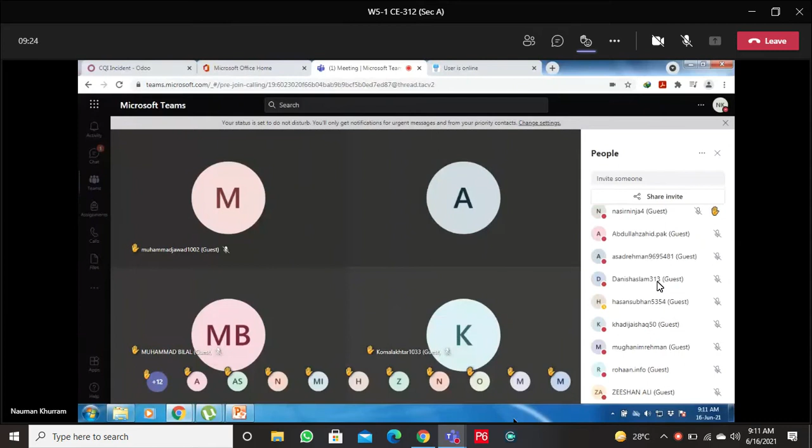Zeeshan Ali, please respond. Yes, sir. So you haven't watched the video yet? No, sir. Sorry, sir.

No problem. So have you downloaded the videos? Yes, sir. Okay, that's fine.

Please watch all the videos, and whatever questions you have, please write down so that you could ask me in the coming lectures, or maybe when we will have the psychomotor assessment week, so you can ask me these questions physically. Okay, Mr. Rohaan, Deputy CR.

Mr. Rohaan, so-called Deputy CR, are you online?

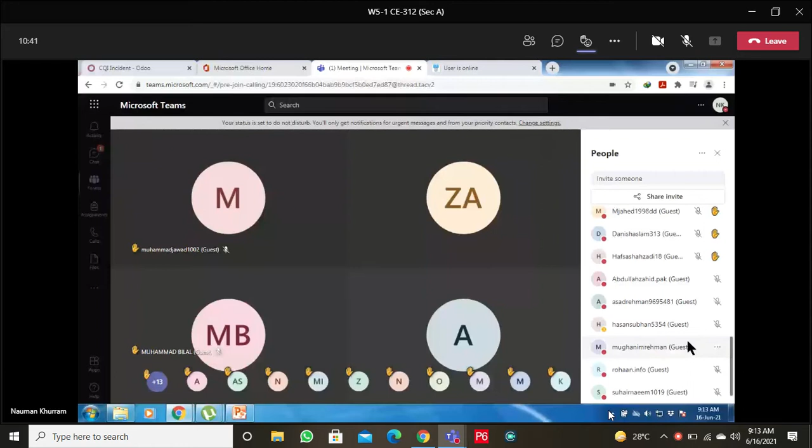Okay students, I would like to clear one thing. Regarding the shear center, when you study the characteristics of shear center, the shear center always exists at the intersection of center lines of all elements.

For example, you are having a T section. In case of a T section, if center lines of all elements intersect at one point, the shear center will be that intersection point.

But if you have a doubly symmetric section, in that case the centroid will be the shear center.

But in case of an angle section, the shear center will be this junction point, because that is the intersection of the center lines of this vertical leg and this horizontal leg.

So even though we have the centroid over here, we do not apply the load along the centroidal axis, because if we apply the load at the centroidal axis, it will cause twisting along with bending.

That's why in most of the books, if you find the loading diagrams, the load is acting at the shear center point, passing through the center line of this vertical leg.

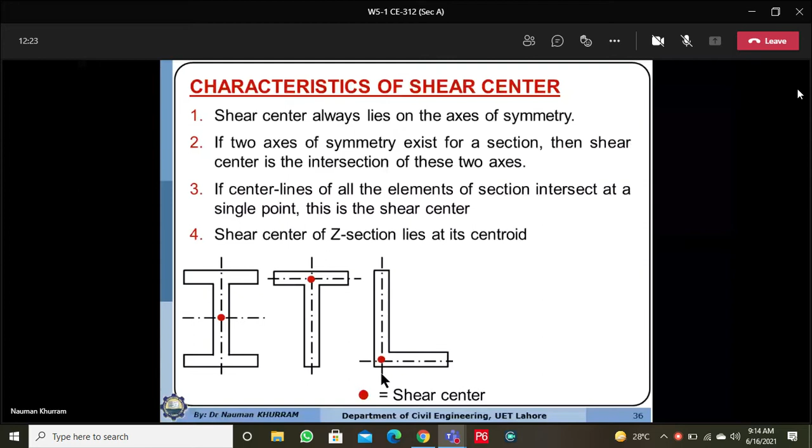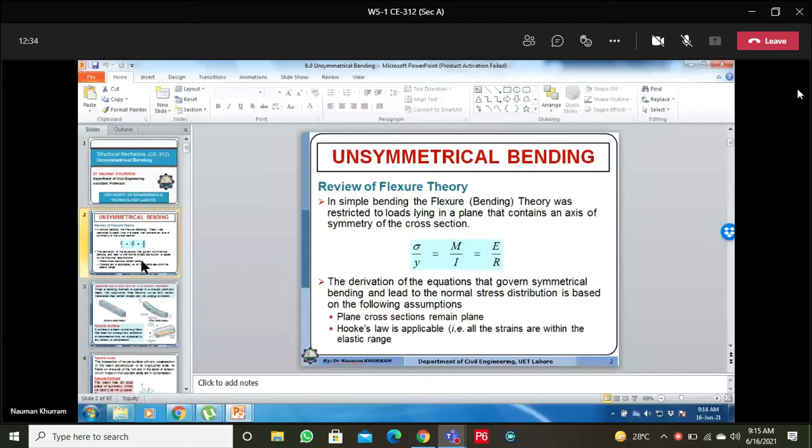That's why, for example, when we study unsymmetrical bending, in that case, for example, to avoid the twisting, the load must pass through this center line, the intersection of this flange and web.

If the load is passing through the centroid instead, even though it passes through the centroid, this will bend along with twisting.

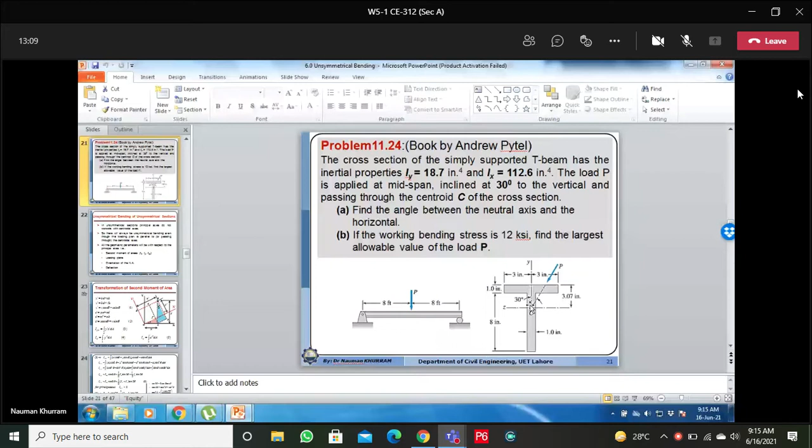Similarly, for the angle section, the correct loading to avoid the twisting is that it should act through the center line of this vertical leg.

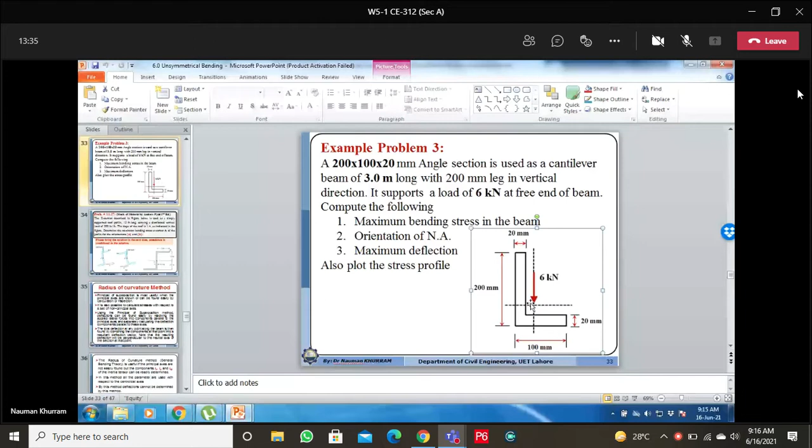If the load is acting here, it is acting at certain eccentricity from the center, so it will twist along with bending, and you will have extra bending stress, so that you will clear up. The center of this T section is over here, and the center of this Z section will always be at the centroid, because the distribution of the area is even though that is not a symmetrical section.

So today we are going to discuss the solution of this problem. Before discussing the solution, I would like to, okay, later on I will download it.

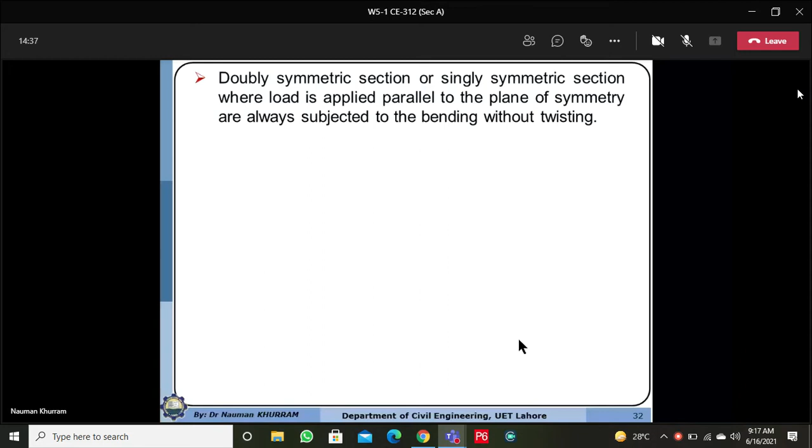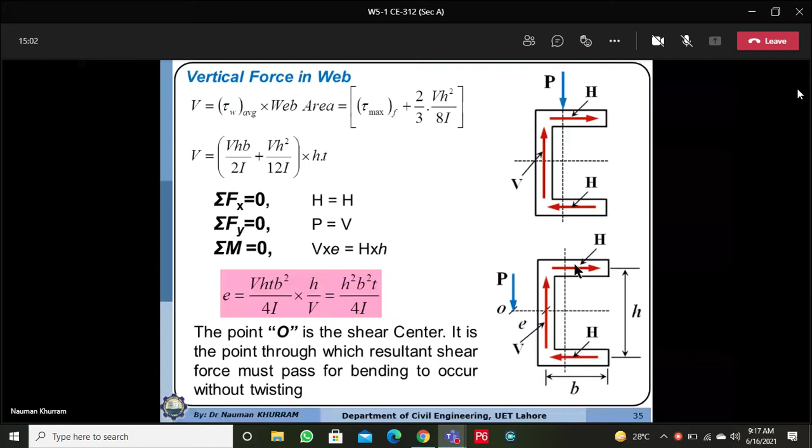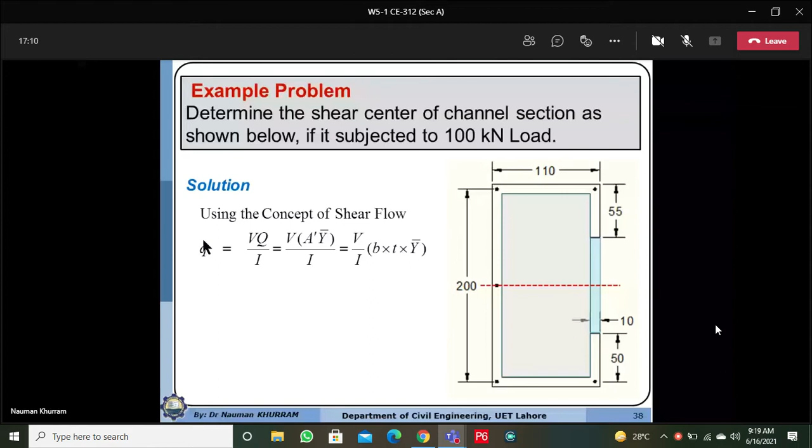So using the concept of shear flow formula, you will also have the B value or the thickness here. So the expression for shear flow is VQ over I. V is the resisting shear, which will be equal to the applied force. I is the moment of inertia of the entire cross section. Q is the static moment of area under consideration, of partial area, which can be written as a partial area and moment arm of partial area with respect to the neutral axis.

Since the load is acting in vertical direction, the moment will produce about the x-axis, so we need to compute the moment of inertia about the x-axis. The partial area may have any width and thickness, and the moment arm we have to determine accordingly.

First of all, we need to determine the moment of inertia of this net section. You can determine it by considering the area by parts, or you can determine the moment of inertia of the gross area, and then subtract the moment of inertia of this rectangular and internal rectangular or hollow area to determine the moment of inertia of the net area.

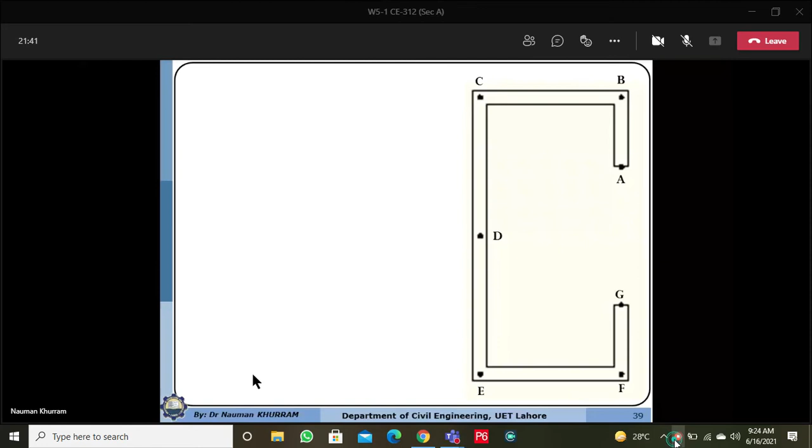Okay, next. First of all, whenever you are dealing with this type of problem, you need to plot three things. First of all, you need to show the direction of the shear flow, in which direction the shear is flowing, by using the analogy of water flow. So we are assuming that the applied load is acting downward directly.

So anyhow, if the shear flow in this web is acting upward, so by using the analogy of shear flow, flow is always unidirectional. The total shear flow coming at point E should be equal to total shear flow leaving point E. So from E, the flow is moving upward. It means that flow is coming from F to E. So direction of the shear flow will be over here.

And similarly, direction of the shear flow from C to B will be like this. And similarly, if you know the direction of the shear flow from F to E, then it means that flow is coming from G to F. And similarly, flow is moving from B to A because flow should be unidirectional.

So this we have plotted by using the concept of water flow. So that's why that is called shear flow.

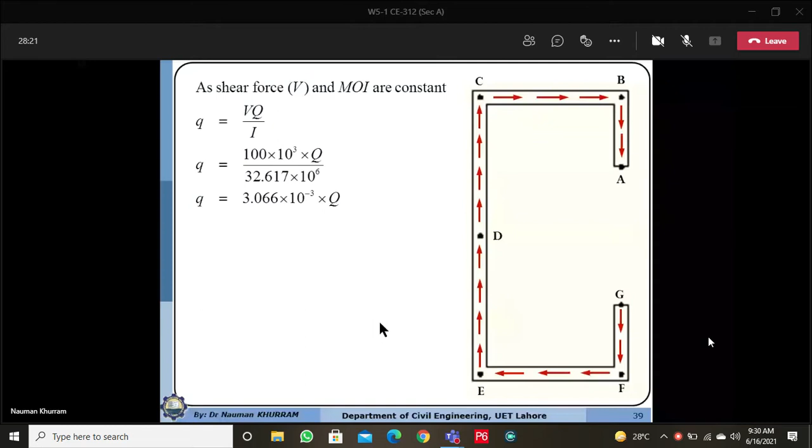We are having entire area, but on the bottom side, we do not have any area, so QA will be equal to 0. That's why shear flow at point A will be equal to 0. I have also written a reason because no partial area exists at the bottom side.

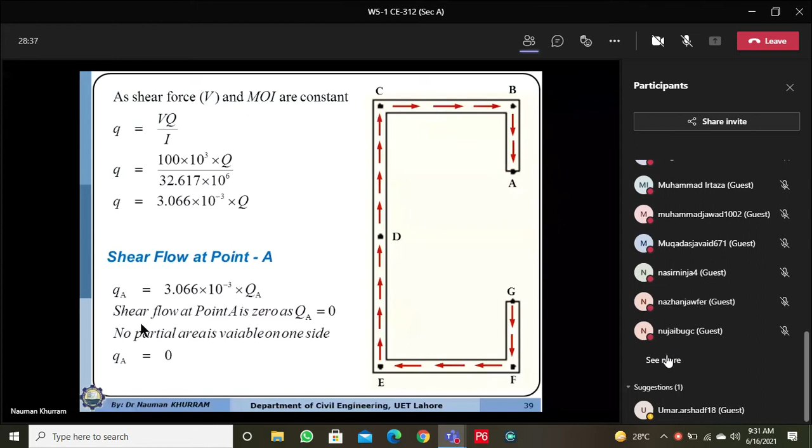Next, we would like to determine the shear flow at point B. When I want to determine the shear flow at point B, I need to consider the area starting from point A to B, using the contribution of the area from A to B. I will assume the cutting layer at point B with respect to this projected length. Thickness of this area will equal the thickness of this projected portion, since thickness is always perpendicular to the length of the area, not equal to the entire line. So thickness is considered with respect to this projected portion.

Shear flow at B will equal this constant parameter times the contribution of area from A to B, or static moment of area from A to B. Shear flow at B can be computed by considering the partial area on either side of this cutting layer, so I will consider this area because it is smaller in magnitude. Please note that I am determining the shear flow at the center of the element, since shear flow is always determined and plotted through the center line of the element, so I'm determining it at this junction. Shear flow with respect to this projected portion of length can be computed by this expression QAB.

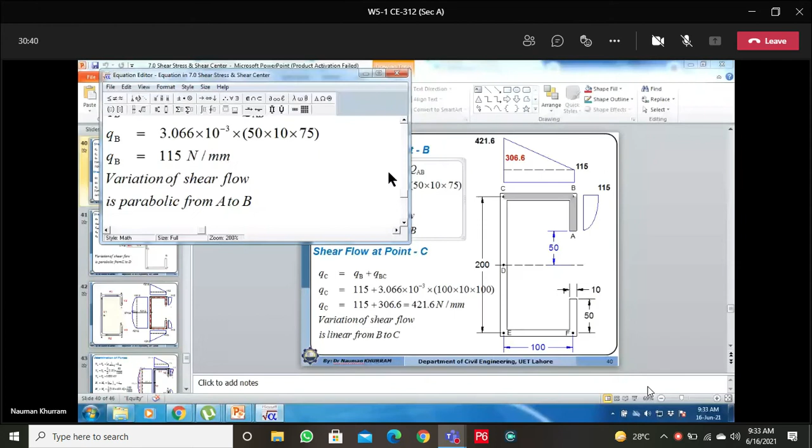For your simplification, I don't have any space, but I will write it out: partial area, length of this area will be from A to B, which is equal to 50 millimeters. Length LAB will be equal to from free end tip to this junction, center of this junction, which is equal to 50, and thickness of this area is equal to 10. And then moment arm of...

Yes, sir. Okay, could you see the screen? Yeah.

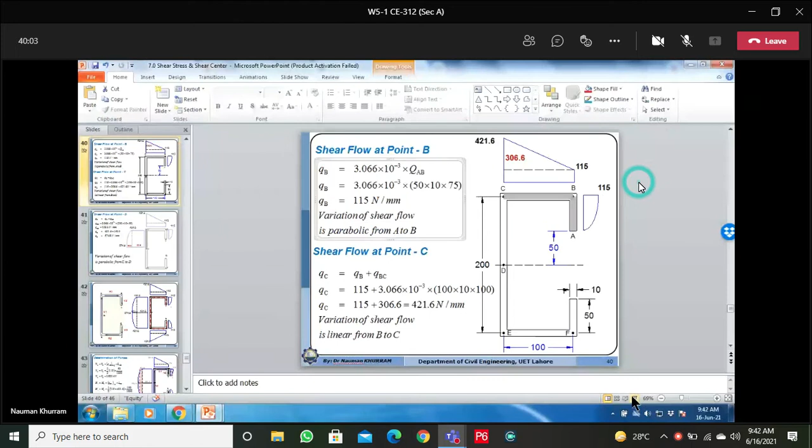Okay, dear students, next point is that we need to determine the shear flow at point B, with respect to this projected portion. If we want to determine the shear flow at point B, we need to assume the cutting layer. The cutting layer will be perpendicular to the length of this element, and the thickness of the cutting layer will always be equal to the thickness of this element.

So here, this parameter is constant. It means that if I want to determine the shear flow at point B, I need to determine the static moment of area on either side of this cutting layer. I will determine it at the bottom side because that area is less in magnitude, so that will have less computation effort.

So QAB will be equal to the partial area of AB and the moment arm of AB with respect to the neutral axis. Length AB will be equal to 50, and the thickness of this area from A to B is 10. 50 times 10 is the area, and 75 will be the moment arm of this AB area with respect to the neutral axis.

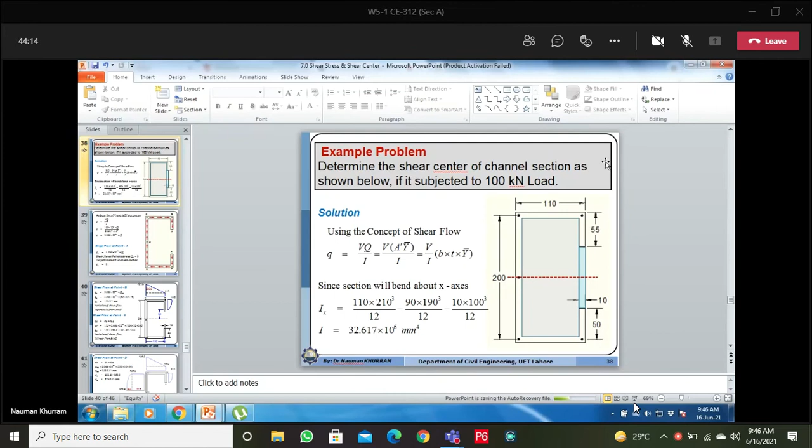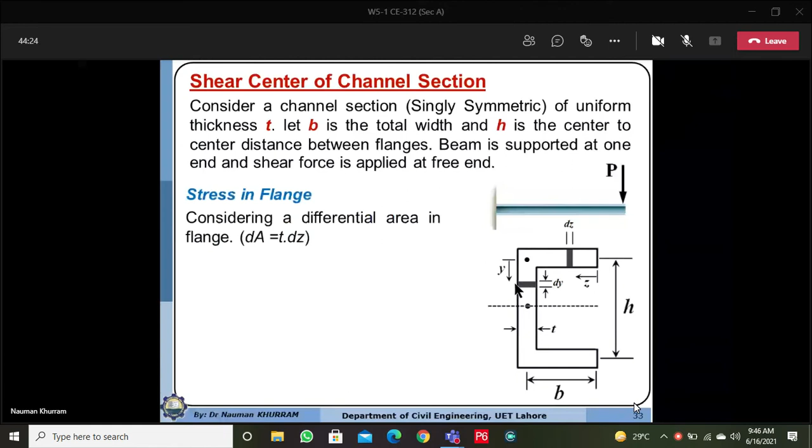Just like I would like to frame here, if you watch this derivation. When we consider this web portion, as area dy is changing, the moment arm is also changing. You will see that the shear stress or shear flow, if you multiply the shear stress by the thickness of the layer, you get the shear flow. Y is second degree on this portion which is parallel to the applied force, because with the increase of area, y is changing as a second degree.

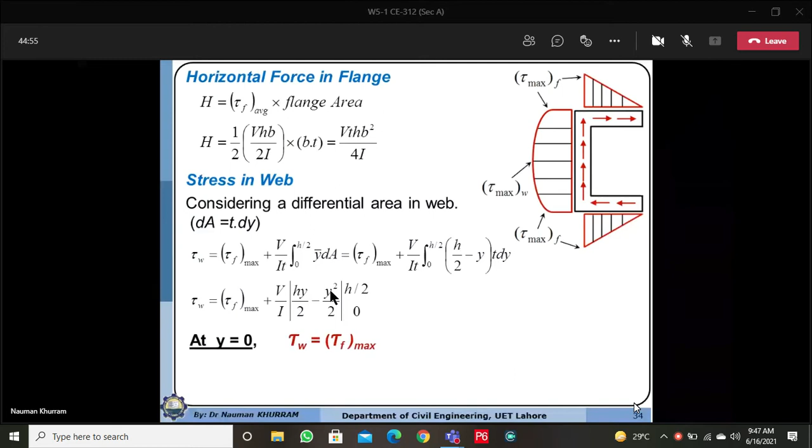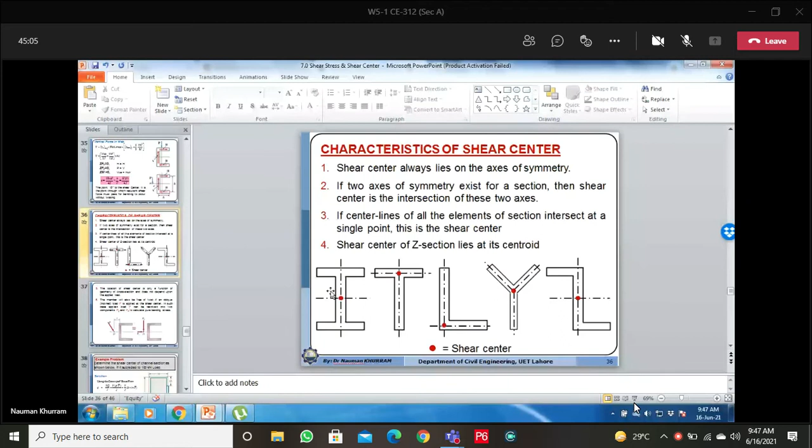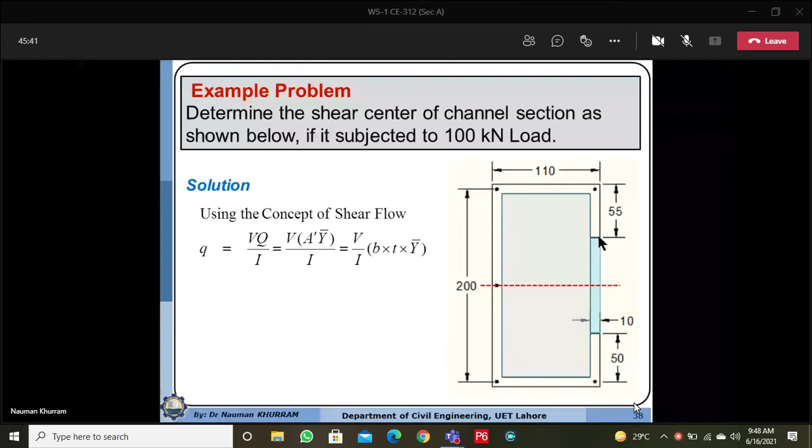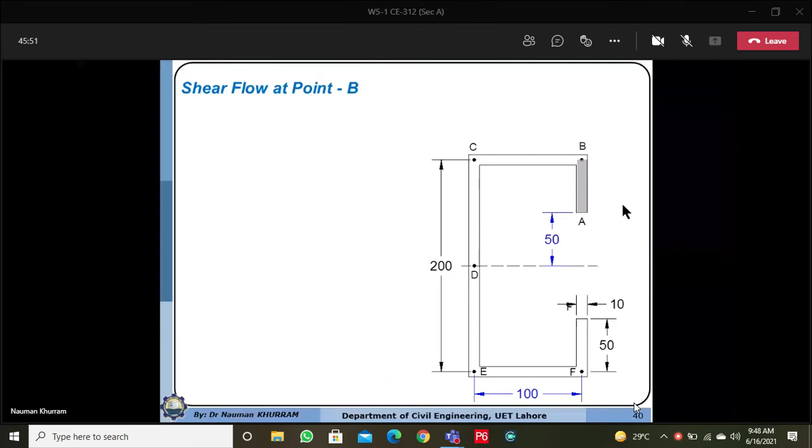So shear flow is increasing from 0 to 115 Newton per millimeter when we are moving from A to B. So this will be the variation. You need to catch this distribution or variation of the shear flow along this element.

Okay, next is shear flow. We know that total shear flow coming at point B is equal to total shear flow leaving point B. So at the junction, whatever shear flow is coming will be equal to the shear flow leaving point B. This is the shear flow at point B with respect to this projected portion, so shear flow at point B with respect to the flange will also be equal to 115.

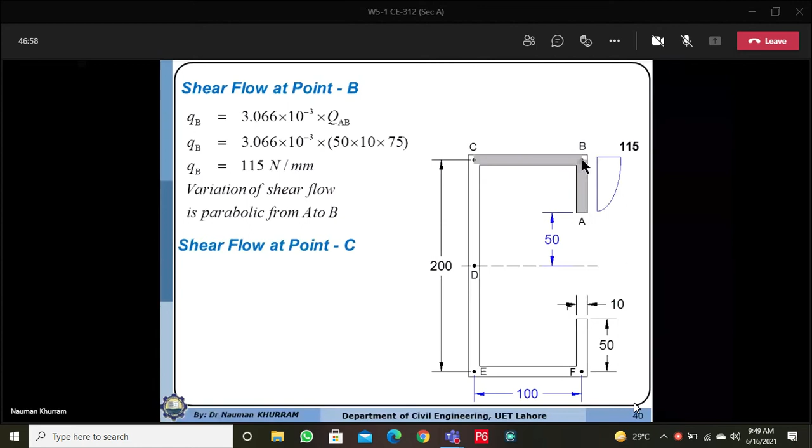So shear flow at point C can be determined by adding the contribution of area from B to C to the shear flow we already computed at point B. Or you can compute the contribution of the entire area from A to C. We are solving the problem by part - we have already computed the contribution of area AB, then we can simply compute the shear flow at point C by adding the contribution of area from B to C to the shear flow already computed at point B.

So total shear flow at this junction with respect to the flange is 115, because shear flow coming in should equal shear flow leaving. And Q_BC is the contribution of area from B to C, so this parameter is constant. When we assume the cutting layer here, the thickness of the cutting layer will always be perpendicular to the length, so length is CB, and the thickness of the cutting layer equals the thickness of this portion. We need to add the value of this area - length from C to B is equal to 100 millimeters.

Thickness is equal to 10 and moment arm will be equal to 100. Distance from the center of this area to the neutral axis will be 100, because total distance from the center of the top line to the bottom line is 200, so half will be 100.

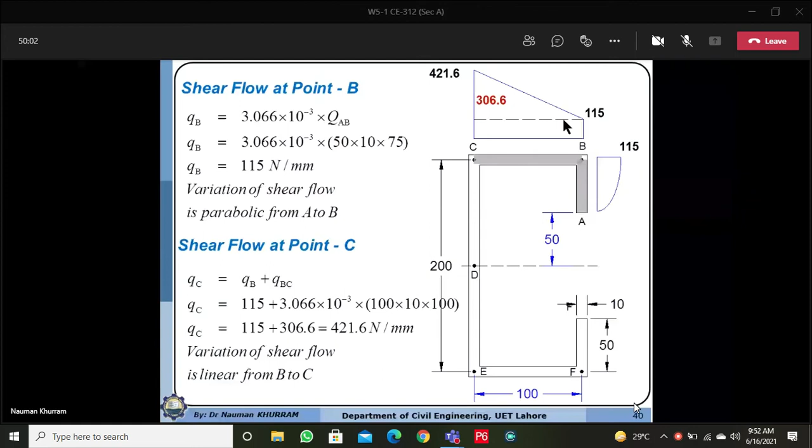So shear flow is increasing linearly from 115 to 421.6. If you sketch a horizontal line, this horizontal uniform distribution indicates the contribution of AB, which remains constant as we move from B to C. The contribution of area from B to C is increasing from 0 to 306.6, so the distance from here to here is 306.6.

Why is this variation linear? Because when we are moving from B to C, the moment arm remains constant, thickness also remains constant, so only the length is increasing.

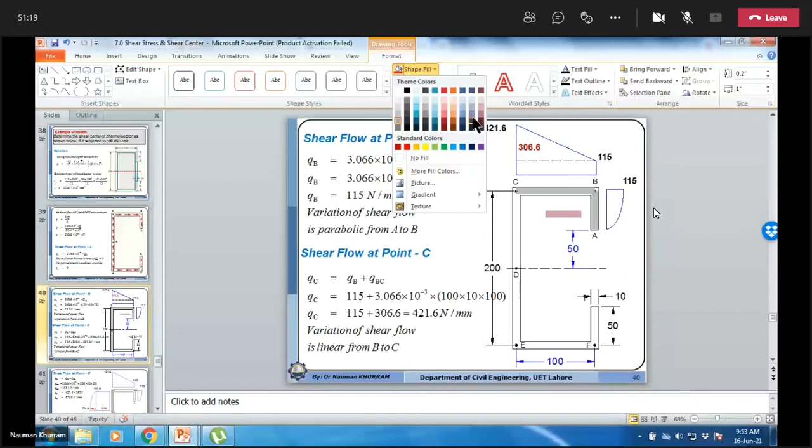So it means that with the increase of area, as we move from B to C, only the length of the area is increasing. So shear flow is a single degree function of area, and the variation is linear.

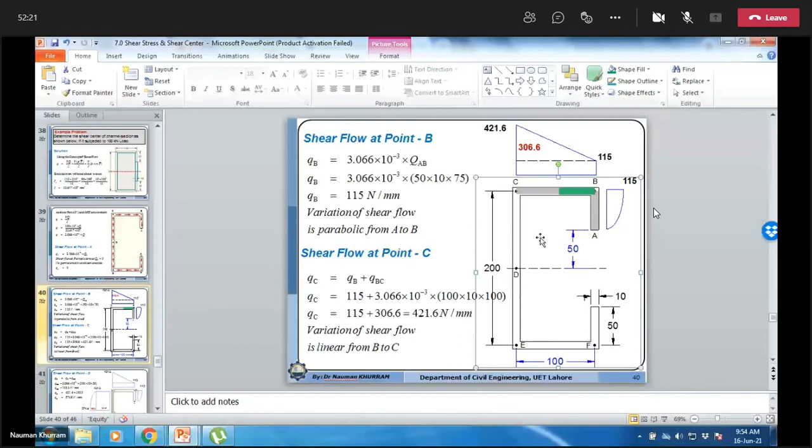We have already discussed that shear flow on the element which is perpendicular to the applied shear, or resisting shear, will undergo linear distribution. So that is the linear part. I have plotted the distribution of shear flow from B to C, and it will look like trapezoidal.

If you do not have this projected portion, then you will have shear flow of 0, and you will have the maximum here. Then it will be 0 here and 306.6 over here, because without this projected portion, you will not have its contribution.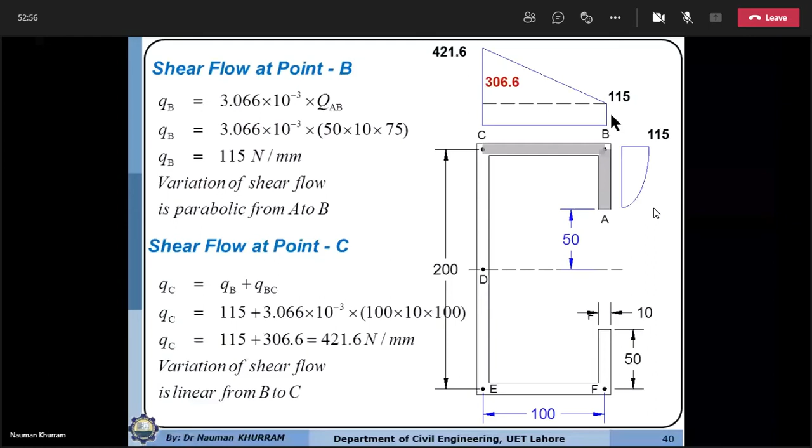Shear flow at the free end tip will be 0. When we move to the junction, it will increase parabolically. It is 0 here because we do not have the projected portion, so we do not have the shear flow coming from the projected portion. So the free end tip is here, and in this case it will go from 0 to some maximum value over here. Shear flow at the junction with respect to the flange will be equal to shear flow at the junction with respect to the web.

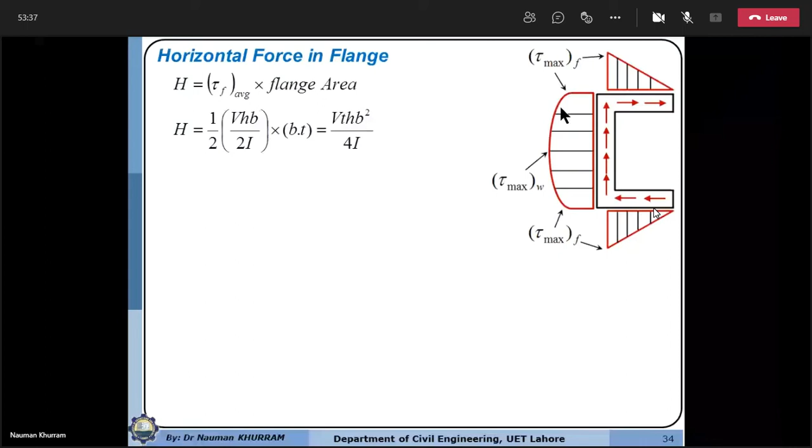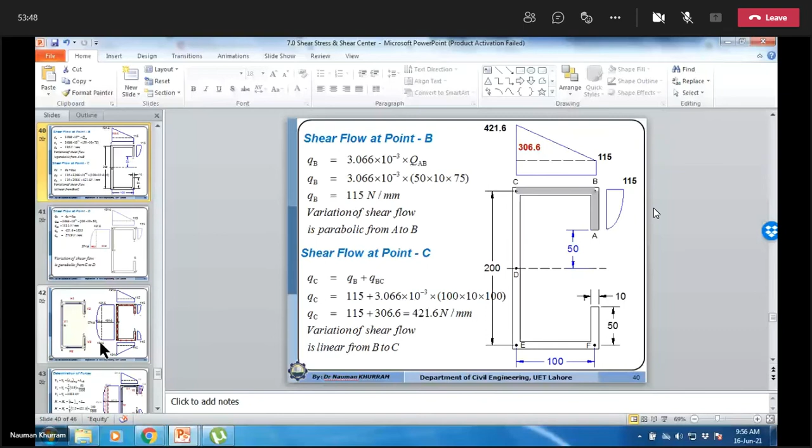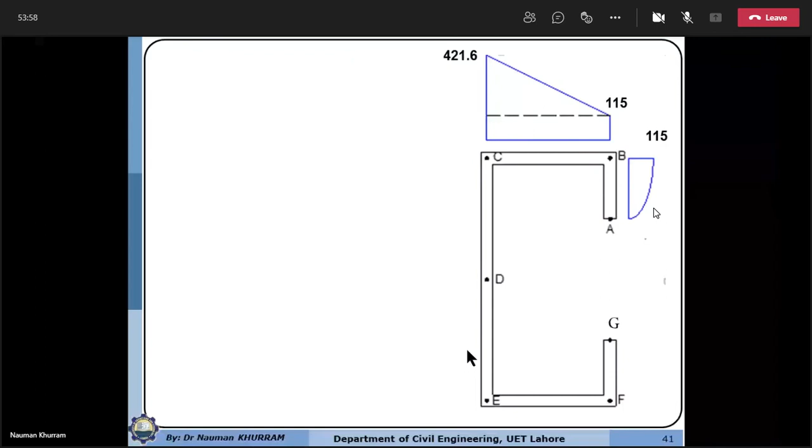Okay, next, let me correct the animation.

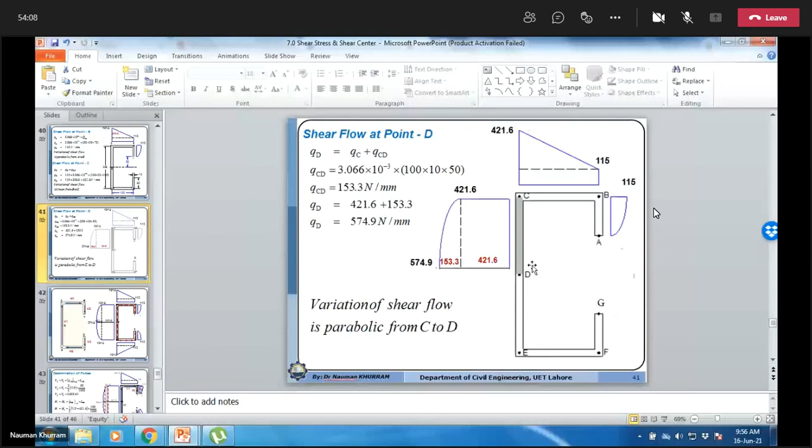Now I want to determine the shear flow at point D.

I have already computed the contribution of the area from A to C by parts, first considering area AB, then from B to C. Now if I want to determine the shear flow along the neutral axis, I need to consider the entire partial area starting from A to D. But we have already computed the contribution of area AB and BC by part, which means whatever shear flow we computed at point C, if we add the contribution of area from C to D, that will be the total shear flow acting along the neutral axis.

So I am writing this expression: shear flow at point D will be equal to shear flow at point C, because total shear flow coming at point C should be equal to total shear flow leaving point C. So shear flow at point C with respect to web will be the same, 421.6, and we just need to add the contribution of shear flow from C to D. Then we will have the total shear flow at point D.

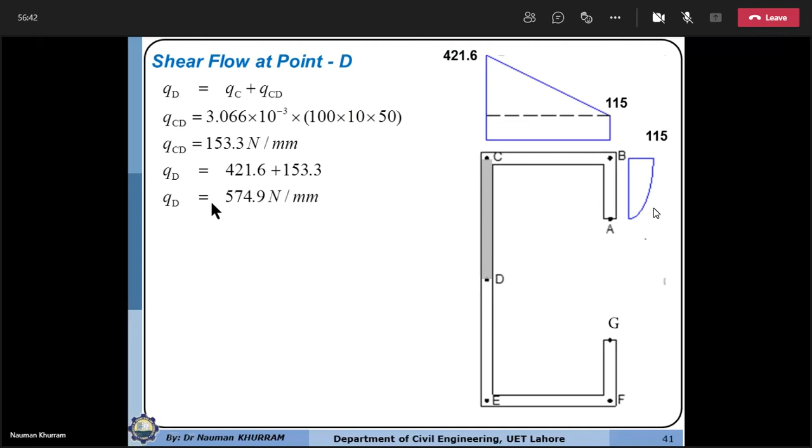So total shear flow at point D will be equal to shear flow at point C, which is 421.6, plus 153.3, the contribution from C to D. The total shear flow at point D is 574.9.

So this will be the distribution. Shear flow at start of point C will be 421.6. Total shear flow coming at point C should be equal to shear flow leaving point C. Then as we move from C to D, the contribution of area from C to D is increasing from 0 to 153. This contribution of 421.6 remains constant because area A to C remains constant as we move from C to D. So contribution of shear flow is increasing from 0 to 153.3 at this point.

And this variation will be parabolic again. Why parabolic? Because this element is parallel to the resisting shear or applied shear. As we move from C to D, both the moment arm and the length of area will change, with constant thickness. Since the cross section is symmetrical about the x-axis, the shear flow on the other side will also be the same.

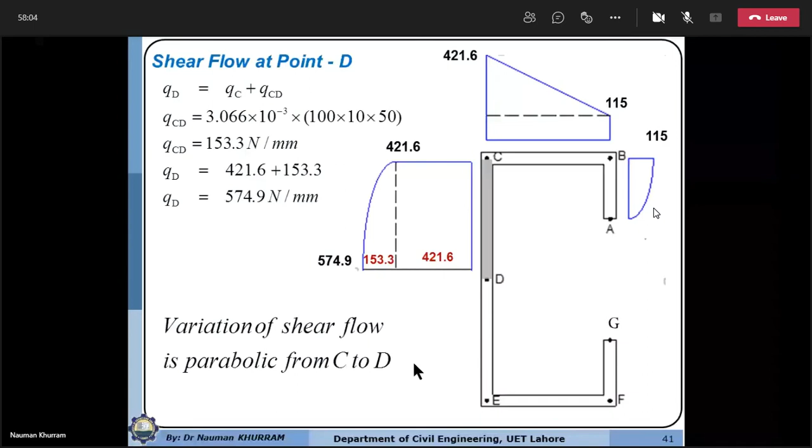Force acting per unit length. It means that if we multiply this average shear flow by the length of the element, we can convert it into force. If you have plotted this diagram by the concept of shear stress, then average shear stress from A to B multiplied by the area from A to B, the answer will remain the same.

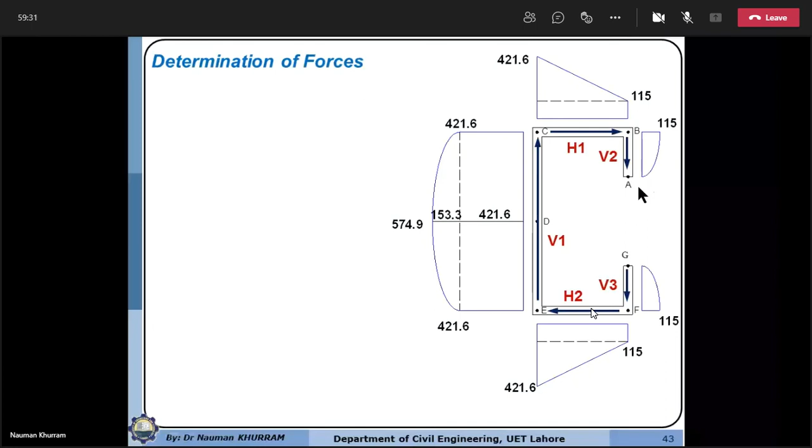Average means that shear flow from point A to B is parabolic, so we will convert it into an average value or an equivalent rectangular distribution. How can we convert it? Just like this, see here: I have converted this parabolic distribution into uniform distribution, so the area of this rectangle is equal to the area of this parabolic portion.

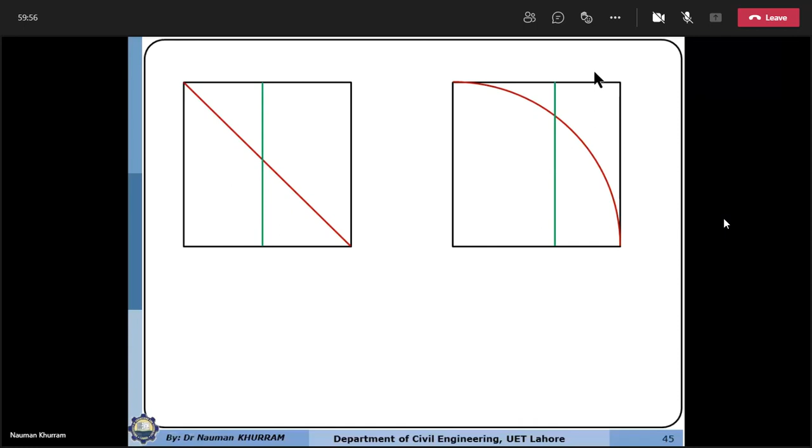Let's suppose, just to understand, first I will explain this. We are having this rectangle which has any area, maybe 1. If I sketch a diagonal, I have converted this rectangle into 2 portions, so the area of this triangle will be half of this rectangle. If this dimension I am considering as 1, and this dimension I am considering as b, maybe width.

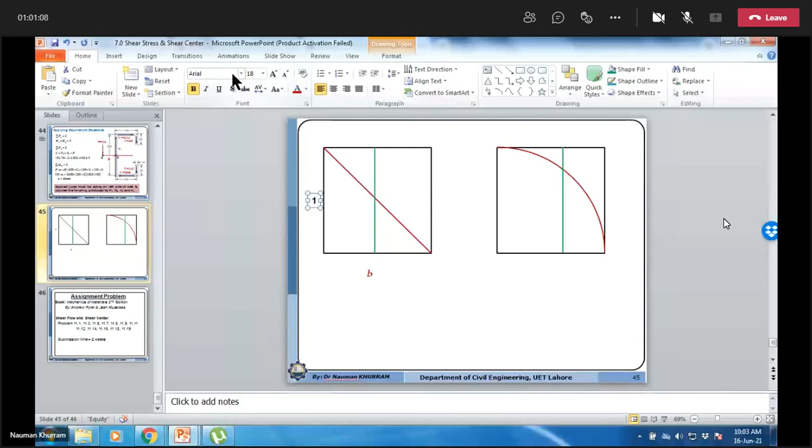And this area is equal to 1, and this is the b value. So then the area of this triangle, because this will be 1 and this will be 1, this width will be equal to b by 2, the average of this width. So this is the width of this green line from here to here. It means that the area of this triangle is also equal to half.

So if I cut some material from here and place it over here, then this average distribution will have the b value equal to half, or average 0 plus this by 2. I can show you this: this is equal to this value, and this value, let me sketch this arrow. That will be more convenient.

So you can say that this dimension is equal to b, and this area, this dimension will be equal to b by 2, because both will have the same area. So I'm converting into the equivalent width.

But similarly, for example, if we are having this rectangular, now we have sketched this parabola. So area under this parabola is 2 by 3, and area above this parabola is 1 by 3. So if I can convert this rectangular into 2 portions, this area is 2 by 3 and this is equal to 1 by 3. So this dimension is constant, so the equivalent area marked with the green line, and area under this parabola, under this red line, they have the same area, but the width of this parabola, which is an equivalent rectangular having the area equal to the parabola, that will have the equivalent width 2 by 3.

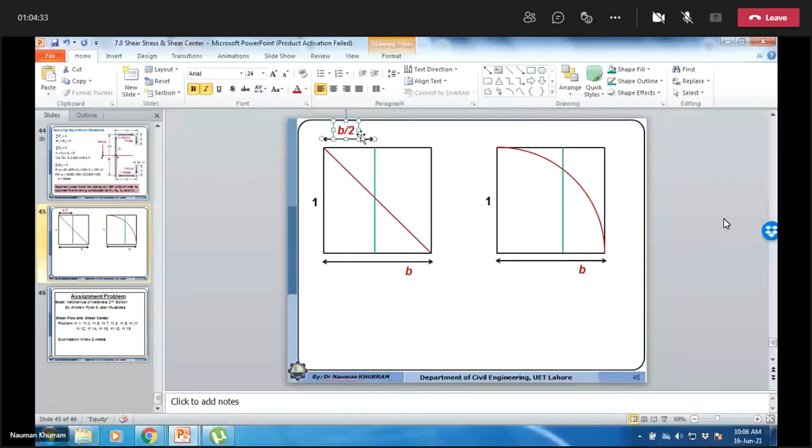So we can convert into the average or equivalent value by multiplying with 2 by 3 of this b value. So we are converting this area into the equivalent width. The same concept is used over here.

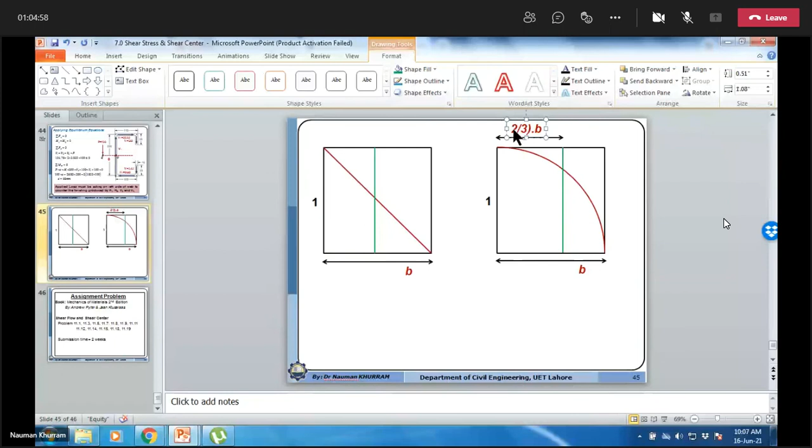So I can convert this shear distribution of shear flow into the shear force. So I am marking or designating the shear force which is produced from A to B and G to F as V2 and V3. Since the length of AB and GF is the same, they are undergoing the same distribution, so it means that the value of V2 and V3 will also be the same.

So average shear flow on portion A to B multiplied by the length, because units are Newton per millimeter. So average shear flow multiplied by the length of segment, we can convert it. So if I multiply the 115 by 2 by 3, I can determine the equivalent width or a uniform thickness or uniform distribution of shear flow.

So 115 multiplied by 2 by 3, because that is a parabola. So 115 multiplied by 2 by 3 to convert into the average shear flow, multiplied by 50, because the length from A to B is 50. Newton per millimeter multiplied by millimeter, answer will be Newton. And if you divide by 1000, you can convert into kilonewton. So just like I have shown.

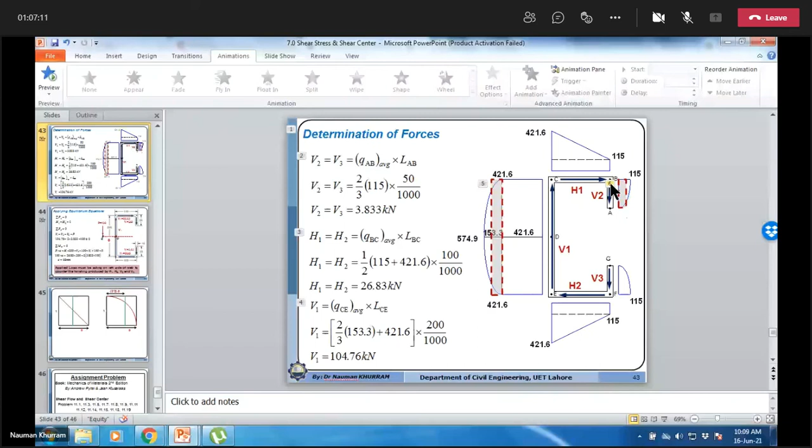That is the average thickness, because the area of this parabola and the area of this rectangle will be the same.

Similarly, shear force from C to B and from F to E will be the same, and the direction of the force will be the same as the direction of the shear flow that we have sketched over here.

So if you multiply average shear flow from B to C with the length from B to C, you can convert into shear force. So average means you can take the average of this vertical ordinate, because area of the trapezoidal is the average of their vertical ordinate. 115 plus 421.6 divided by 2 is the average vertical ordinate, multiplied by the length from C to B and divided by 1000 to convert into kilonewton.

The answer will be 26.83. So you can convert it into this force.

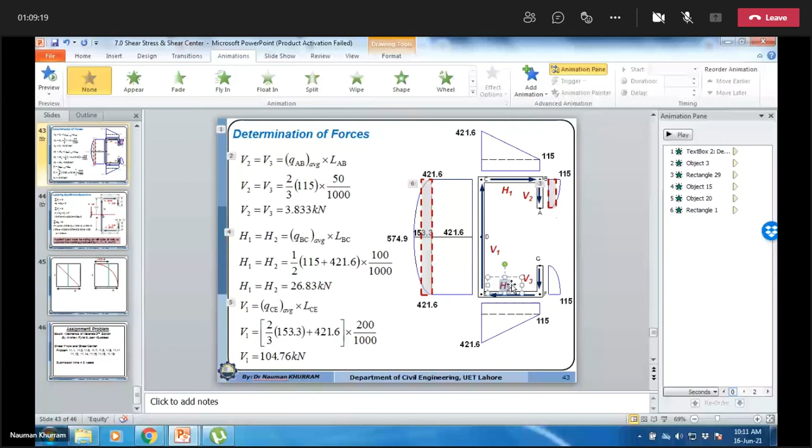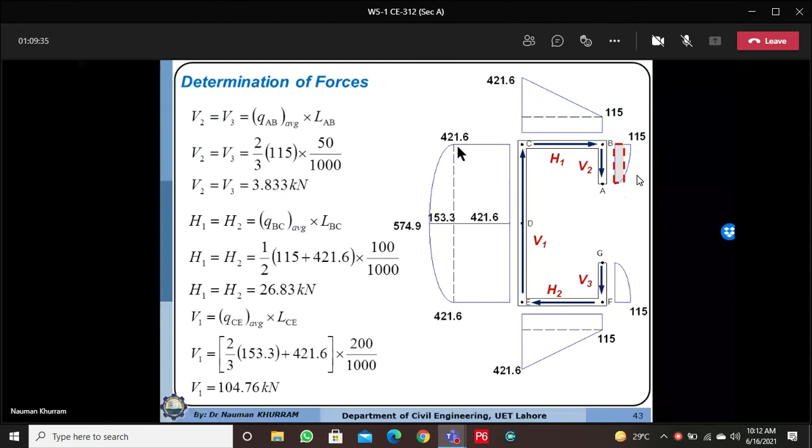And now rest is we need to determine the shear flow in this web. So total length of the web multiplied by the average shear flow in the entire web. So you can split up this distribution of shear flow into two parts: one part is uniform rectangular and the other is this parabola.

And here, this is already uniform, 421.6. We just can convert 153.3 into the average thickness or average distribution. So this width, area of this rectangle will be equal to this parabolic portion. So 421.6 is constant.

Just if you multiply this ordinate amplitude 153.3 by 2 by 3, then we can convert into the average distribution. So average width will be 421.6 plus 2 by 3 of 153.3. So the length from C to E is 200, divided by 1000 to convert into kilonewtons. So the answer is 104.76 kN. Okay, now you can plot the force diagram.

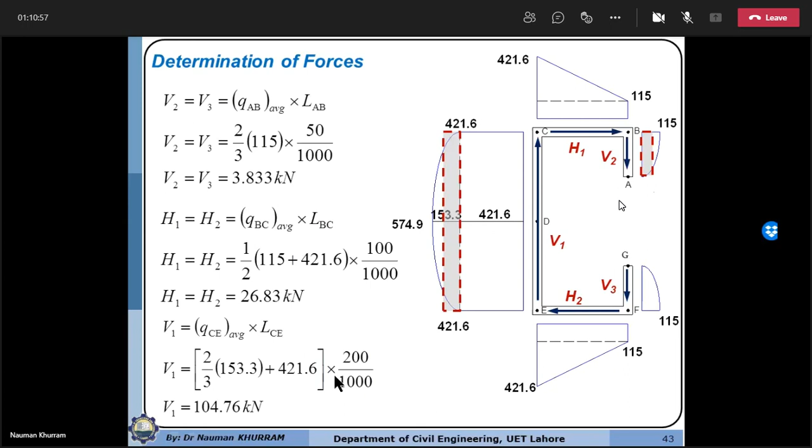In this force diagram, you can show the value of V1. So H1, H2, they are same. V2, V3, and this will be the applied force which is acting in the downward direction. So we are assuming that P should be acting on the left side because we want to determine the location of point O, which is the shear center from the center of the web.

Because the internal forces in the projected portion and in the flanges tend to produce moment in the clockwise direction, the force should act on such a side that it produces counterclockwise moment equal to the moment produced by these internal resisting forces. So I have considered the left side from the center of the web.

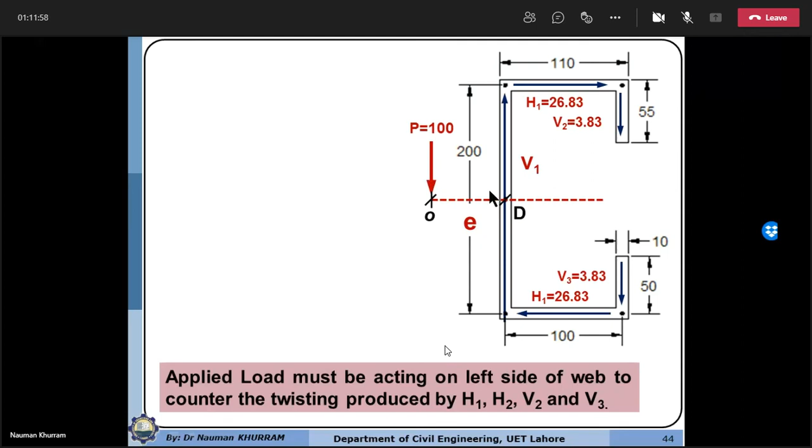If you apply the equation Fx equal to 0, H1 and H2 have the same magnitude, so they will cancel out. If you apply the equation Fy equal to 0, V1 is upward, V2 and V3 are acting downward, and their algebraic summation should equal 0. So the answer will be approximately equal to 0.

Sometimes you may have an error of around 5% that can be ignored. This error occurs because of the rounding of values, or also because we are considering the contribution of shear flow across thickness to be equal to 0 or constant.

Next, I will always suggest you consider the equation of moment produced by all forces about the center of the web equal to 0. You can also take the equation of moment produced by all forces about point O equal to 0. But it is always better to consider the center, because the V1 value you computed may have some rounding error, while P is a constant given value.

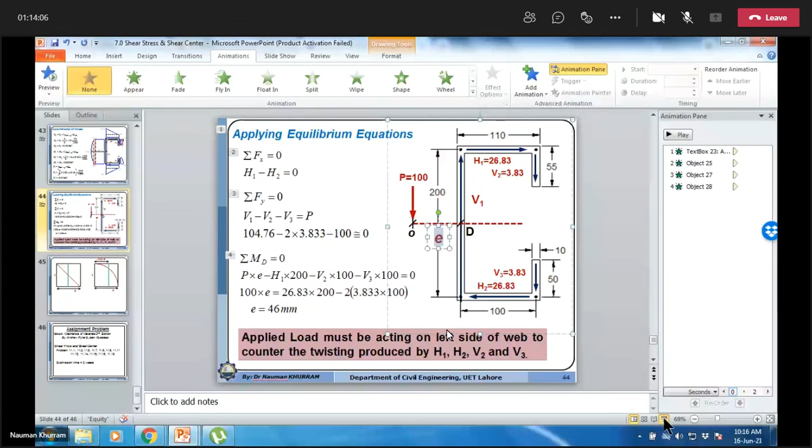This force H1 has a moment arm with respect to point D of 100, and H2 also has a moment arm of 100. So instead you can consider any one force multiplied by the total distance between the two forces, that is 200, or you can write H1 into 100 plus H2 into 100. The answer will be the same thing, and since these forces produce clockwise moment, the answer is negative.

Similarly, force V2 will have a moment arm from this center line to the center of this force of 100. So V2 into 100, and V2 produces moment in the clockwise direction, so it's negative. V3 will also produce moment in the clockwise direction, which is also negative.

So the only unknown value is E. By solving this equation, you can determine the value of E. So E comes out to be 46 millimeters.

If by mistake during computation you considered the P force on the other side, the magnitude of the answer will be the same, but you will have a negative sign. This means you considered the force in the wrong direction. You don't need to recompute the value, just write down a comment that the force should be placed on the opposite side.

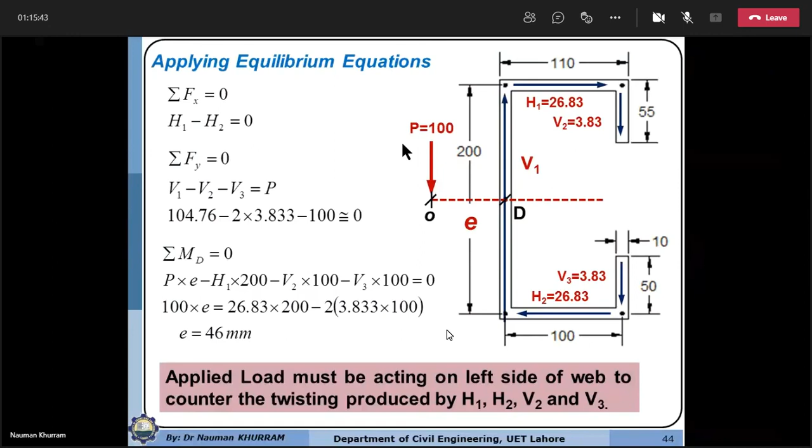So in this way, you can compute the location of the shear center by computing the values of the shear flow and shear forces.